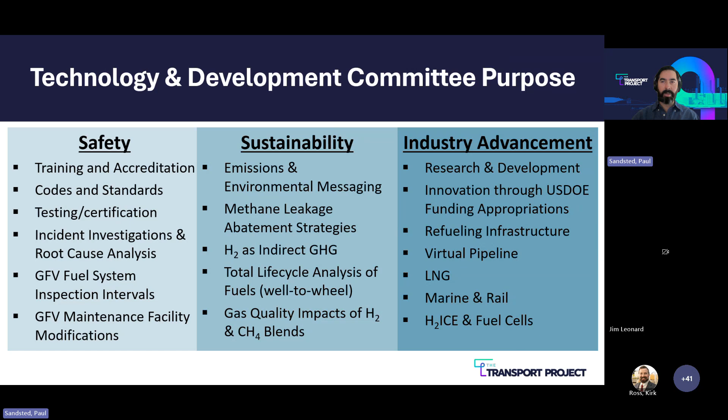And industry advancement, we try to do our best to secure R&D funding through DOE funding appropriations, and that funding is then put towards various research, development, deployment, and demonstration projects for heavy-duty vehicles powered by natural gas and hydrogen. We also dabble in the virtual pipeline world as well, and in the high horsepower world in marine and rail applications. Hydrogen is also a focus for us within the committee. We look at those hydrogen internal combustion engines and the fuel cell electric vehicles.

All right, so without further ado, let's get to the real reason we are all here today, and that is to talk about these facility modification guidelines for maintenance and repair of natural gas vehicles. This is our latest publication to review the fleet facility code requirements, advance awareness of CNG hazards that exist inside a maintenance facility and repair garages, and enhance the safety of CNG fleet operations. This resource was recently published last month, and we made that announcement with the press release on March 24th.

You're going to hear from a lot of the contributors and the subject matter experts that contributed to this document and supported the development of it. So I want to recognize them in this slide. So Cummins Clean Fuel Technologies, we're going to hear from Chris Culberson today, Jim Leonard with J.R. Leonard Construction Company, Leo Thomason with AFVI, and Chip Wertz with WM. We're going to hear from them in the upcoming slides. But thanks, guys, very much for your time here today and all of your support throughout the process of developing this document.

Real quick history lesson. This technically is the third edition of this document, coming from a first edition published in 2012 by the Clean Vehicle Education Foundation, and then again in 2017 was republished by Natural Gas Vehicles for America, which is our previous name. And finally, we are now in the third edition, published just last month. And there is a real strong focus on reviewing these code requirements that exist from both the International Code Council and the National Fire Protection Association. A total of 7 different codes are referenced in this document.

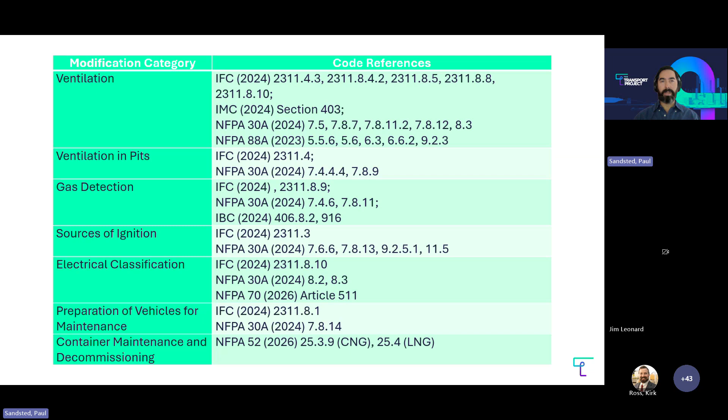And while the majority of regulations are developed and reference those particular code requirements, the two that are referenced most and are predominant within the various authorities having jurisdiction and their regulations are NFPA 30A and the International Fire Code. So we're going to focus on those two today, but I just want to highlight the fact that there are a multitude of codes out there that specify various requirements for natural gas and hydrogen powered trucks going inside a facility.

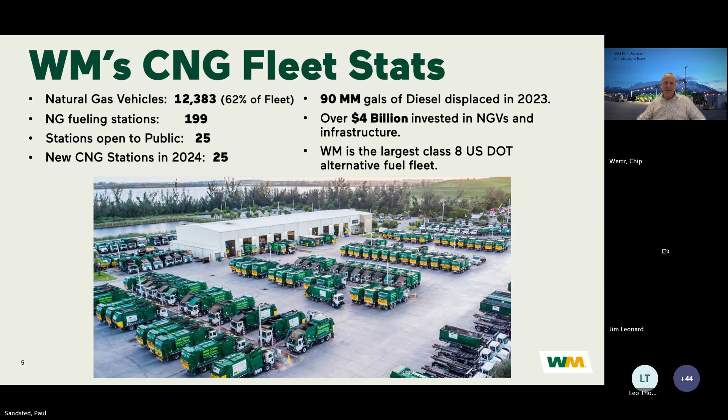And when it comes to hazard analysis and looking at our facilities, one of the first things that Paul and Leo mentioned in the beginning was why do we do this? And for us, one of the biggest things it comes down to is we have a saying in our company, and that's that we want to get home safe each and every day. So we want to ensure the safety of our employees and our people, to give them the tools to do their job in a safe environment, to ensure that building that they're working in is going to be safe for the type of maintenance that they're doing on the vehicles.

Whether it's a diesel truck, a natural gas truck, or a hydrogen truck, whatever fuel type we're using, we want to make sure that working environment that they're in is suited for that type of work. So from an owner's perspective, when we go and look at a facility, one of the first things is, was that building that they're doing the maintenance in even designed and constructed to be a vehicle maintenance facility to begin with? Does it have the ventilation, are the electrical systems safe for doing that type of work?

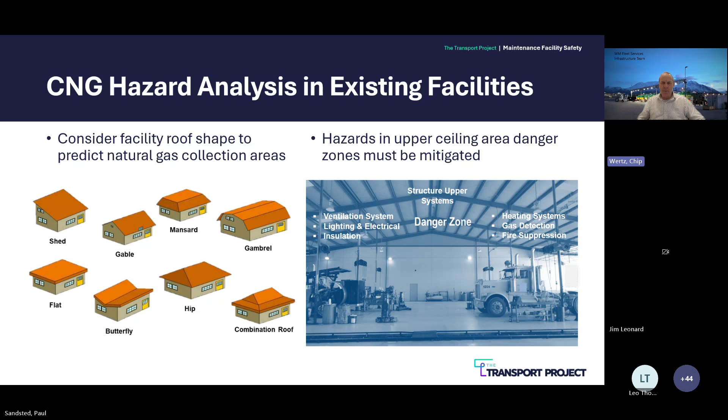Paul, I think we can go to the next slide. I think that may be the last.

Yeah, I guess this one shows some of the details on the area classification zones in the ceiling areas, and some of the concerns of open flame heaters, and that you cannot have ignition sources over 750 degrees.

A lot of the systems for the ventilation side of it, if you have methane detection where the methane sensors are in the ceiling, first you have to identify a leak. But then the next thing that happens is that you typically turn on the ventilation systems, and part of that is to also increase ways for fresh air to come into the building.

That's usually done through opening overhead doors or through louvers in the walls that are typically down lower at the floor, so it brings in fresh air from the bottom and then exhausts it through the top of the ceiling.

I think, Paul, Jim is probably going to get into more detail on many of these areas. So I think I'll stop there and we'll wait for questions at the end. Yes, sir. Thank you so much, Chip.

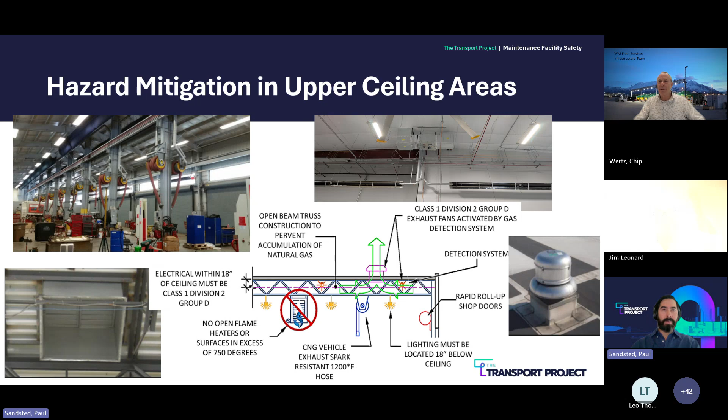And I should have mentioned earlier in my introductory remarks that we're focused on CNG in this webinar. The guidelines document, which was recently published, does also contain LNG specific content, but for the purposes here today, we are keeping things focused on compressed natural gas.

So where these hazards would exist in upper ceiling areas with CNG, and Leo brought this up, some of those are at the floor level with LNG. So hazards on both top and bottom areas, depending on the type of fuel you're using. All right.

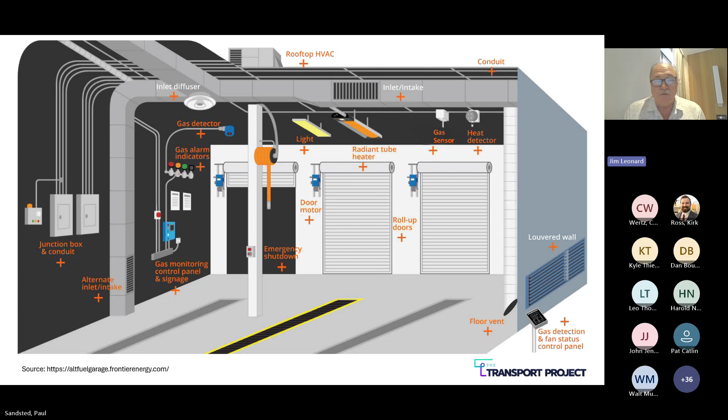The newer facilities, pretty much cookie cutter. You get your standard gable roofs. Most all of your newer buildings are at least 12,000 square feet, and I'm going to comment on that. If they're more than 12,000, they have to have a sprinkler system in them, or they'll be separated by firewalls. So a lot of things to consider, again, with existing and for new construction. Paul, next slide.

These are some of the components of the gas detection system. Obviously, you want the gas detector itself, which is the heart of the system, and the exhaust fans, but the heart of the system, the device that determines the presence of the gas or the potential leak, is the actual gas detector. You want to make sure it's operating properly and that it is detecting the level of the methane, which in this case NFPA requires to activate the alarm in the gas detection panel at 25% of the lower flammability limit. So that's obviously your major component of your gas detection system.

But you would typically have notification appliances also internally on the wall inside the shop, 1, 2, 3, depending on the size and layout of the building and how it's designed. You would have a horn and strobe of some type. It varies by manufacturer, but you'd certainly have an audible visual alarm to alert all your mechanics that, hey, there's a problem. Everybody needs to evacuate the building and gather at the muster point outside of the space.

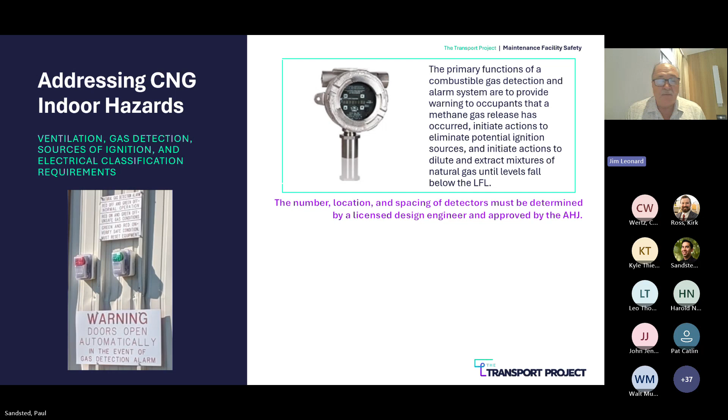Other things to consider. Again, we talk about the Class 1 Division 2 area, which is the 18-inch space at the ceiling level. This particular one looks like a crane there for lifting bodies off trucks and things like that and pulling motors. So you always have to consider, if you go into an old facility, how is that power being fed to that crane? Does it come from the ceiling and drop down, or does it go up a column and go over and hit the crane motor?

Usually the cranes are going to be below the 18-inch as far as their actual motors, because of the nature of the structure, the steel that's built the way they're designed to hang off the steel in the building. But chase down the conduits that feed that motor. Where are they coming from? Are they coming from that ceiling? Are they just open EMT, electrical metallic conduits, what we call thin wall conduits?

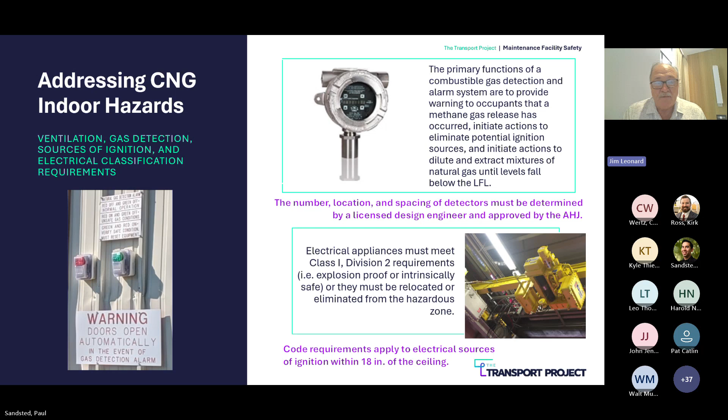If they are and they're up in that class space, they've got to come out and they've got to be lowered. So again, every job's different, every building's different, but these are things you've got to look for when you're converting your fleet over from diesel or gasoline and want to run CNG trucks. You've got to look at all of the different things that could potentially become sources of a hazard for you. Next slide.

There's a lot of talk about, well, do I need to do it? Do I not need to do it? Is my facility a major or minor repair facility? This pretty much qualifies it here. This is right out of the book. In NFPA, if it's minor, it has to meet these requirements. It has to be completely defueled 100%. And you can only do routine maintenance work, lubrication, inspection, engine tune-ups, replacement of parts, fluid, brake changes, tire rotations. You can't do anything with working on the engine. You can't leave it in there overnight. You can't work on the CNG fuel system in any way, shape, or form.

A major repair facility: if you bring it in and the level of natural gas in the tanks is above 250 psi at 70 degrees Fahrenheit, and you plan on working on the vehicle's fuel system in any way, shape, or form, or you need to do any service on that truck that requires welding or open flame or torch of any kind, or if you're going to leave it in there overnight, it's got to be considered a major repair area.

And in either case, you still have to have a methane detection system. You can't get out of that requirement. You have to do that. That's in the code, 2024 NFPA 30A. So it doesn't matter if you want to consider it major or minor, you still have to put in the gas detection system if you're going to have CNG trucks in your maintenance facility.

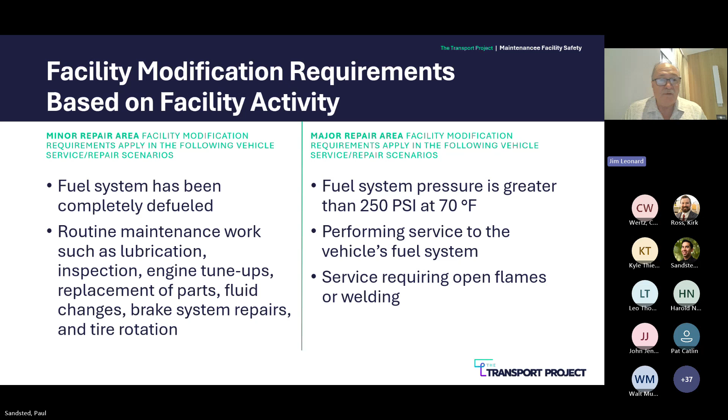Okay. Just as a snap here of some of the requirements and how they have changed a little bit. As you can see there, 2021 and later, 7.8.11, flammable gas detection required. So we were all operating in the industry under the thought process that we could go into an existing garage prior to 2021 and just run continuous ventilation to purge the building of possible methane releases and to meet the requirement for declassifying the ceiling space at 1 CFM per square foot per the National Electrical Code. That all changed in 2021 with the later edition, and there's no out on that.

You must have a gas detection system, and it must be installed and operating properly. And as far as that goes, if you have failures of that system, like a fault in the panel itself, it's got to deactivate the heating system and activate the mechanical ventilation. So it has to be designed and built to be able to do that. It also has to sound an alarm in an approved location, and most usually that's a horn and strobe that's on the wall in the facility.

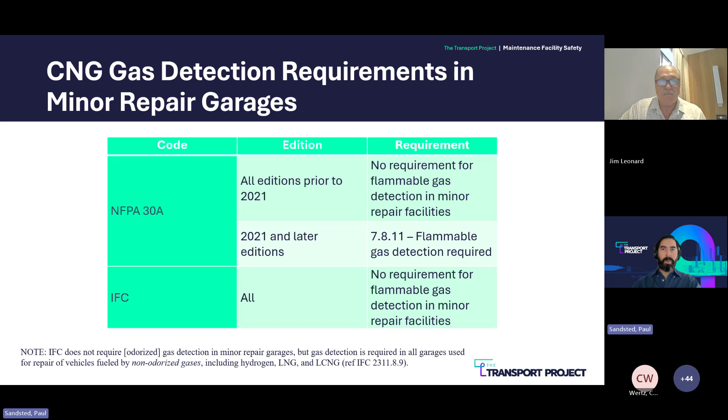Our next speaker is Chris Culberson. He is the Customer Care Manager with Cummins Clean Fuel Technologies. He has 11 years of experience with Peterbilt Motors in off-highway design engineering and field service. He has 3 years of experience with custom vehicle solutions in engineering and operations, 10 years of experience with Momentum Fuel Technologies, which is the Cummins Clean Fuel Technologies former entity, in engineering, service, and training. And Chris has a BS in mechanical engineering from Texas A&M University.

So Chris is going to talk to us about a new best practice that is not actually contained in any code or standard today. So this is some very forward thinking that Chris was very helpful in putting together. So without further ado, Chris, I'll hand it over to you. Okay, thank you.

What we'd like to talk about today is, if you remember Jim's presentation just a minute ago, in IFC, International Fire Code, there is no requirement for methane detection in a minor repair facility, and a minor repair facility can be defined if you have below a certain pressure in your fuel system. Go ahead and go to the next slide, Paul. So for natural gas, it talks strictly about pressure. They put in hydrogen, and hydrogen has a maximum volume, standard cubic feet of hydrogen that could come in.

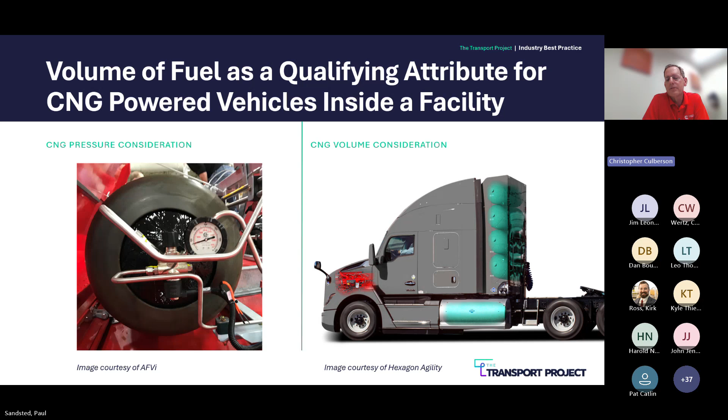So one of the things that we are recommending is that instead of looking at just the pressure, maybe we need to start looking at the volume as well with natural gas. Can you go to the next slide, please? So a close approximation, it's not exact, is to use the ideal gas law. Some of the parameters that we need to run this: what is the maximum standard cubic feet of methane that we believe is safe to come into a facility?

Once we determine that, we can calculate based on current CNG pressure, the approximate gas temperature, and the fuel system capacity. So we need to know all of these things. Temperature has a very big effect on pressure in a fuel system, so getting the gas temperature plays a big role. A lot of people have heard of the ideal gas law, pressure times volume equals a couple of constants times temperature. We can calculate how much allowable volume would be in a fuel system. So that's what step one is laying out.

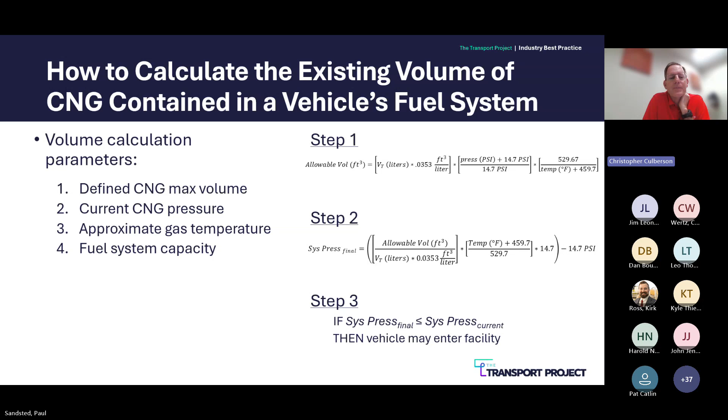As Jim said, if your state or jurisdiction adopts NFPA 30A, there is no out that you have to have a methane detection, but a lot of states have adopted IFC instead, and some jurisdictions. So it depends on where you're at. Go to the next slide, please.

So this is an example. If we're saying that the allowable volume of gas is 400 standard cubic feet of methane, which we got because that's what IFC allows for hydrogen. If we make that assumption, for this calculation we're going to say that the vehicle volume, the system capacity, is 1,000 liters. And we're going to say that the initial gas temperature is 60 degrees Fahrenheit.

So when you do this calculation, it's 400 cubic feet divided by the volume, 1,000 liters converting to cubic feet, and then the temperature conversions and everything, that would mean that our allowable pressure is 148 psi. And just for reference, that 1,000 liters is going to be approximately 75 DGE.

Like I said, when that paper was written, that study was done by Sandia, that was a very typical volume of a CNG fuel system. But nowadays, 175s are becoming extremely common, and upwards of 200, 250 are not uncommon.